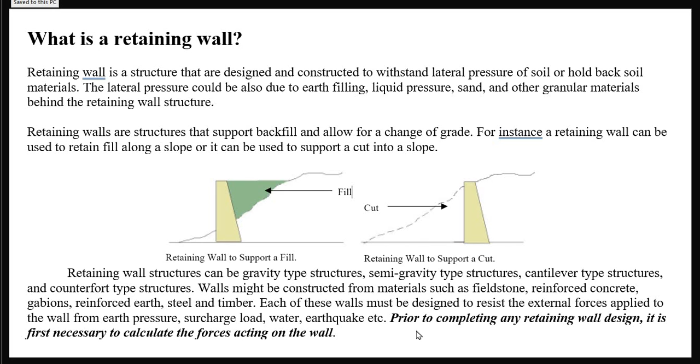Each of these walls must be designed to resist the external forces applied to the wall from earth pressure, surcharge, water, earthquake, etc. Prior to completing any retaining wall design, it is first necessary to calculate the forces acting on the wall. The types of retaining walls are: 1. L-shaped, 2. Gravity, 3. Cantilever, gabion, piled retaining, mechanically stabilized earth or MSE, crib wall, counterfort or buttressed, anchored, and lastly, hybrid systems. Ito naman yung drawing niya.

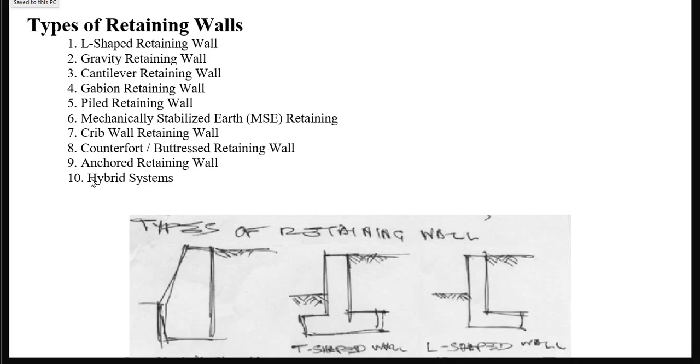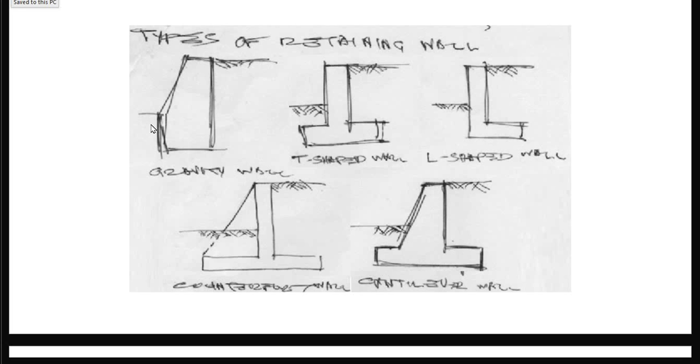So, ito yung gravity wall. Usually, this is defined by the mass or the weight of the structure itself. Wala siyang extra na extension nung footing, unlike dito sa T-shaped wall and cantilever and L-shaped wall. So this relies solely on the bulk of the mass itself. And then we have the inverted T, the L-shaped, and the cantilever wall. Itong cantilever, it is a combination of gravity and L-shaped wall. So, ang ide-design natin dito would be itong first 3: 1, 2, and 3.

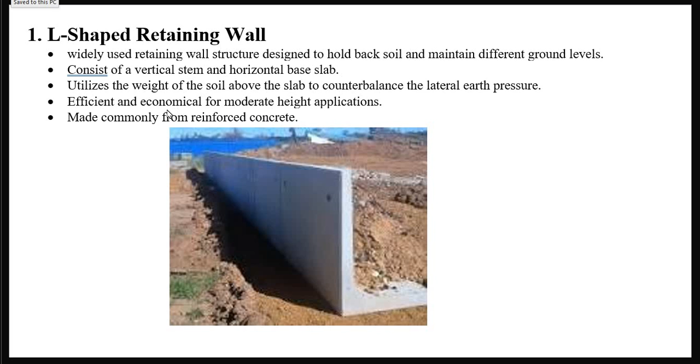Para sa L-shaped retaining wall, it is a widely used retaining wall structure designed to hold back soil and maintain different ground levels. It consists of a vertical stem, which is ito, and a horizontal base slab. Usually, yung base slab, yan yung nasa ilalim ng soil, and itong front face, ito naman yung nakaharap sa kalsada. It utilizes the weight of the soil above the slab to counterbalance the lateral earth pressure, efficient and economical for moderate height applications, and it is made commonly from reinforced concrete.

And then we have the gravity retaining wall. It depends on its self-weight only to resist lateral earth pressure. A gravity retaining wall is massive because it requires significant gravity load to counteract soil pressure. Sliding, overturning, and bearing forces shall be taken into consideration in the design. It can be constructed from different materials such as concrete, stone, and masonry units. It is economical for a height up to 3 meters. Crib retaining walls, gabions, and bin retaining walls are also types of gravity retaining walls.

And then number 3, we have the cantilever retaining wall. It is composed of a stem and base slab. It is constructed from reinforced concrete, precast, or pre-stressed concrete. It is the most common type used as retaining walls. It is either constructed on site or prefabricated off-site. The portion of the base slab beneath backfill material is termed the heel. Ito siya. And the other part is called the toe. Ito naman yung nasa harapan. A cantilever retaining wall is economical up to a height of 10 meters. It requires a smaller quantity of concrete compared with a gravity wall. Similar to the gravity wall, sliding, overturning, and bearing pressure shall be taken into consideration.

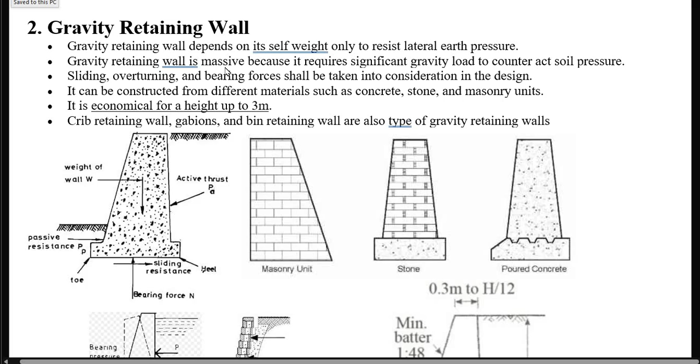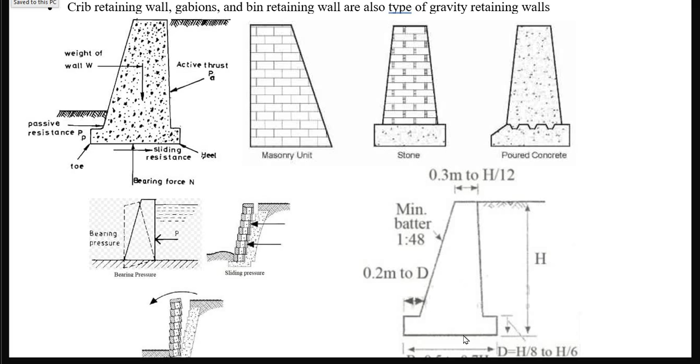Para sa gravity retaining wall, ito yung common dimensions niya. So yung top ng retaining wall, ang minimum ay 0.3 meters or 1 foot up to h/12, wherein h is from the top of the retaining wall up to the base of the footing. And then yung minimum batter or slope is 1:48, or 1 part horizontal and 48 parts vertical. And then etong depth ng footing is equal to h/8 to h/6. Tapos yung base naman ng footing is 0.5 to 0.7 of h. So ayan, magdedepend yan sa height. And then etong toe is 0.2 meters to equal to this dimension d.

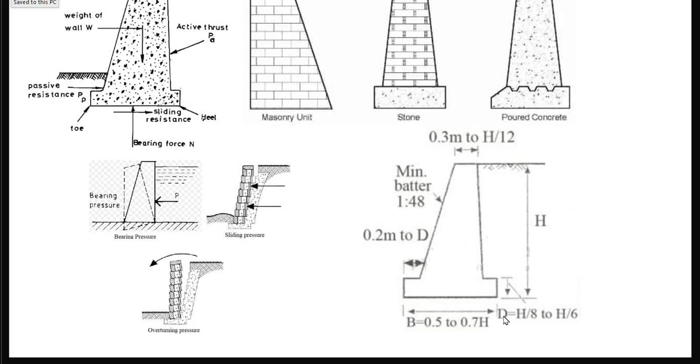And then for the gravity wall, ito naman yung modes of failure niya. Ito, bearing pressure. So yung lupa dito sa ilalim ng toe, yan ang lumambot, so magfe-fail siya. And then yung sliding naman, yung wall mo is itinulak ng lateral earth pressure.

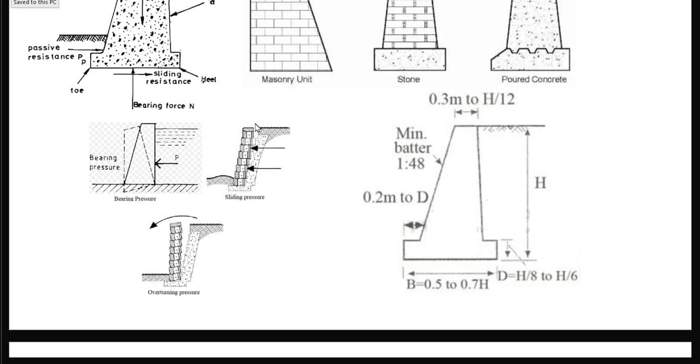And then yung overturning pressure naman is hindi enough yung weight ng gravity wall to resist the lateral force. So dito sa overturning, mapapansin nyo na yung base ng footing is naiwan doon, hindi siya nag-move. So yung top ang nag-move. Unlike sa sliding pressure, yung movement sa taas is the same as the movement at the bottom.

It is equal to 0.5 of height to 2/3 of height. By the way, etong H, yan yung overall height ng structure from the base of the footing to the top of the wall. And then yung D, this is the thickness of the footing. This is 0.1 of H. And then dimension C, this is the lower width of the stem. This is also 0.1 H. And then yung B naman, ito yung length ng toe. This is 0.25 of L to 0.33 of L. And then yung width sa taas or W, that is 250 mm.

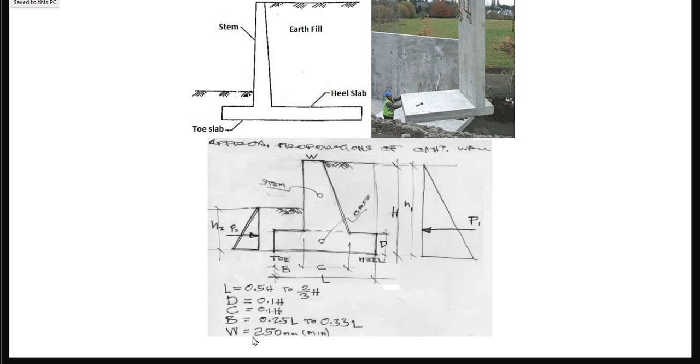And then number 4, this is gabion retaining wall. Usually ito walang konkreto ito. Pinagpatong-patong lang na bato, and then it is held in place by these gabion wires. Gabion retaining walls are walls that are multi-celled rectangular wire mesh boxes usually filled with rocks. So ang bawat cell niyan is ito, it is encased by gabion wires. It is employed for construction of erosion control structures. It is also used to stabilize steep slopes.

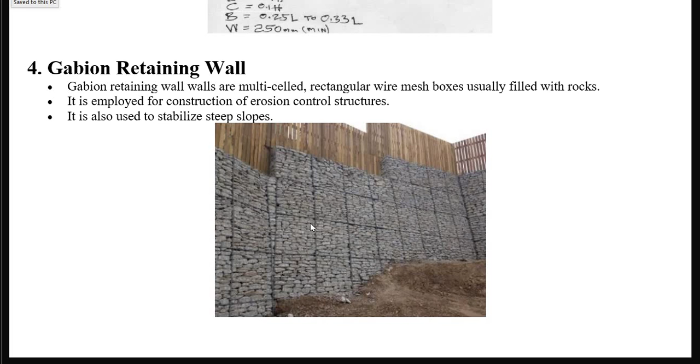And then 5, you have piled retaining wall. These are constructed by driving reinforced concrete piles adjacent to each other. Ito yung concrete piles. Usually mga bilog yan, ano? Piles are forced into a depth that is sufficient to counter the force which tries to push over the wall. It is employed in both temporary and permanent works. Piled walls offer high stiffness retaining elements which are able to hold lateral pressure in large excavation depths with almost no disturbance to surrounding structures or properties.

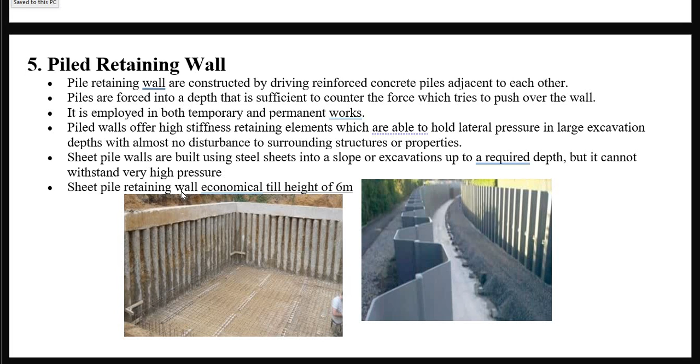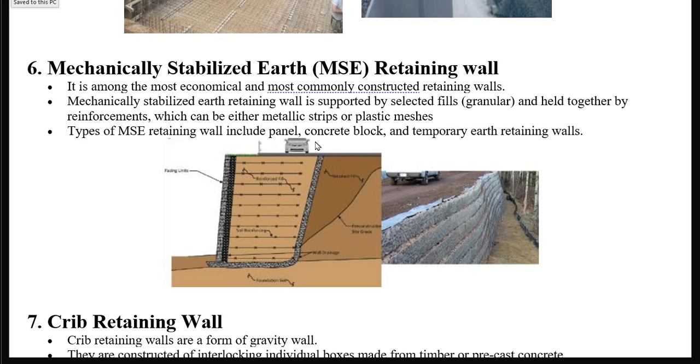Ito naman ang common, yung sheet pile walls. These are built using steel sheets into a slope or excavations up to a required depth, but it cannot withstand very high pressure. Sheet pile retaining wall is economical up to a height of 6 meters. And then number 6, we have the MSE or mechanically stabilized earth. It is among the most economical and most commonly constructed retaining walls. Mechanically stabilized earth retaining wall is supported by selected fills or granular and held together by reinforcements which can be either metallic strips or plastic meshes. Types of MSE include panel, concrete block, and temporary earth retaining walls.

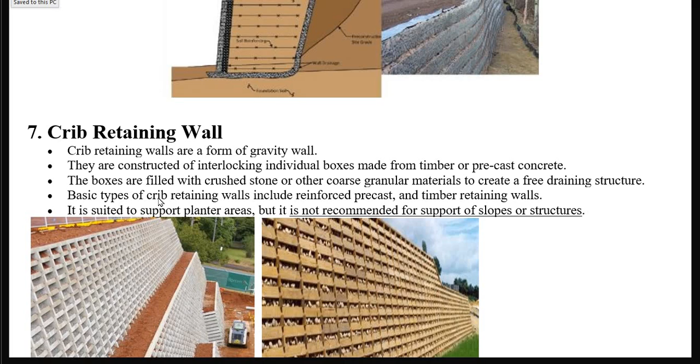And then 7, we have crib retaining wall. These are a form of gravity wall. They are constructed of interlocking boxes made from timber or precast concrete. The boxes are filled with crushed stone or other coarse granular materials to create a free draining structure. Basic types of crib retaining walls include reinforced precast and timber retaining walls. It is suited to support planter areas, but it is not recommended for support of slopes or structures. So itong type na ito, hindi siya common dito sa lugar natin.

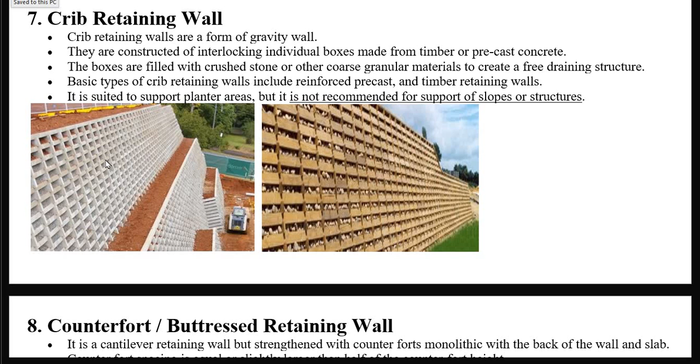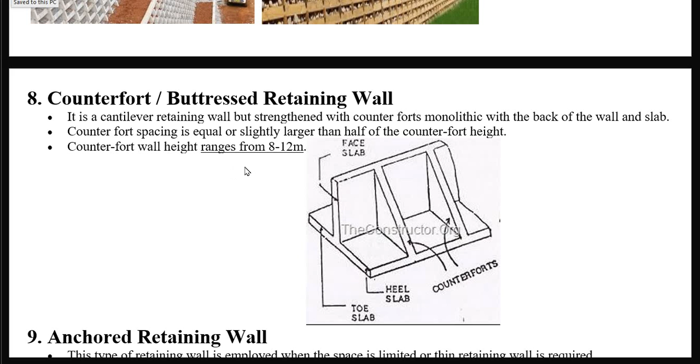And then number 8, we have counterfort or buttressed retaining wall. It is a cantilever retaining wall but strengthened with counterforts. Ito yung tinatawag na counterforts. Monolithic with the back of the wall and slab. Counterfort spacing is equal or slightly larger than half of the counterfort height. Counterfort wall height ranges from 8 to 12 meters. And then 9, anchored retaining wall. This type is employed when the space is limited or thin retaining wall is required. Anchored retaining wall is suitable for loose soil over rocks.

A considerably high retaining wall can be constructed using this type of retaining wall structure system. Cable rods or wires are driven deep into the earth, then the ends are filled with concrete to provide anchor. Anchors or tiebacks act against overturning and sliding pressures.

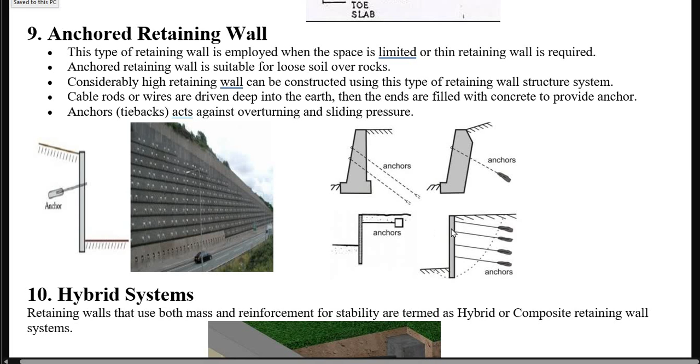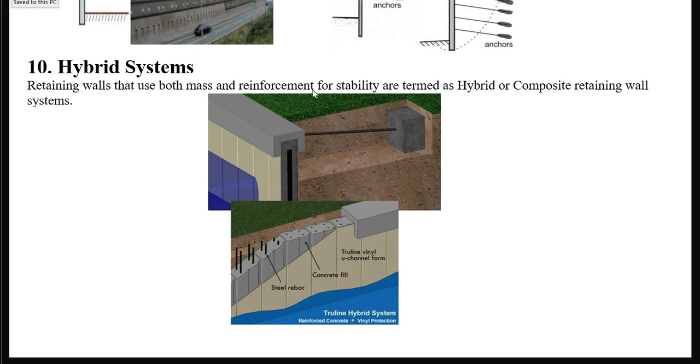And then number 10, hybrid systems. These are retaining walls that use both mass and reinforcement for stability, and are termed as hybrid or composite retaining wall systems.

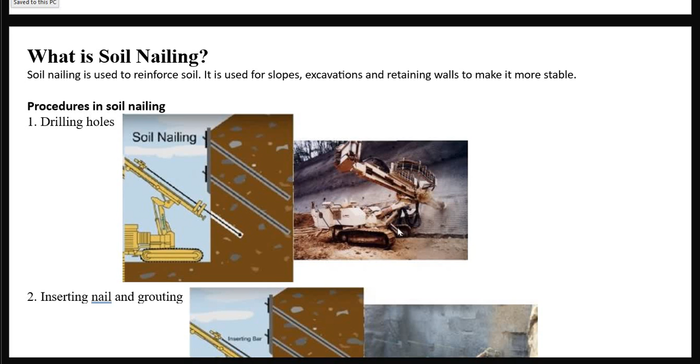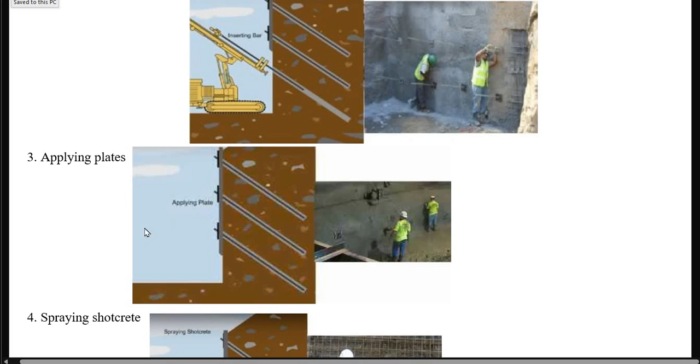And then, ito naman ang common ngayon sa tabi ng mga bundok natin, which is soil nailing. Soil nailing is used to reinforce soil. It is used for slopes, excavations, and retaining walls to make it more stable. So meron siyang mga procedures. First is drilling holes. And then inserting nail and grouting. And then applying plates. And then spraying shotcrete.

And then the types of soil nailing techniques. Number 1, drilled and grouted soil nailing method. In this type, the holes are drilled in walls or slope face. Then, nails are inserted in the pre-drilled holes. After that, the hole is filled with grouting materials such as concrete. Finally, the diameter of nails ranges from 100 to 200 mm with spacing of 1.5 meters.

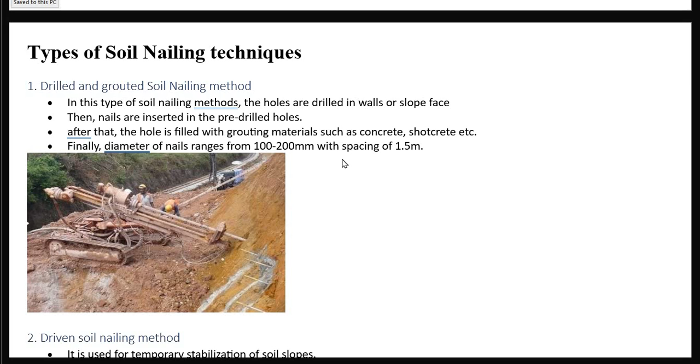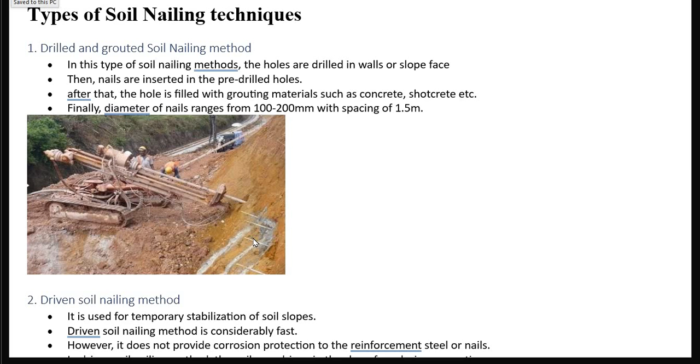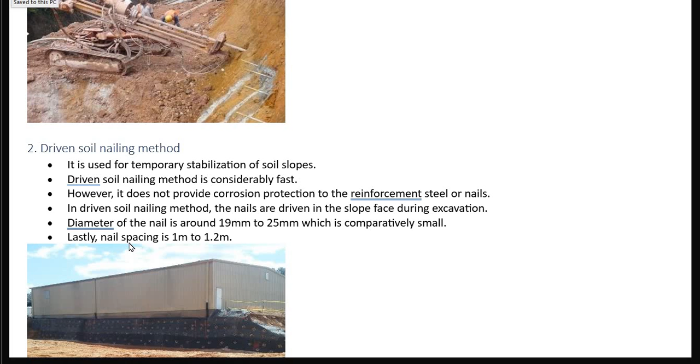So number 2, driven soil nailing method. It is used for temporary stabilization of soil slopes. It is considerably fast. However, it does not provide corrosion protection to the reinforcement steel or nails. The nails are driven in the slope face during excavation. Diameter of the nail is around 19 mm to 25 mm, which is comparatively small. Lastly, nail spacing is 1 meter to 1.2 meters.

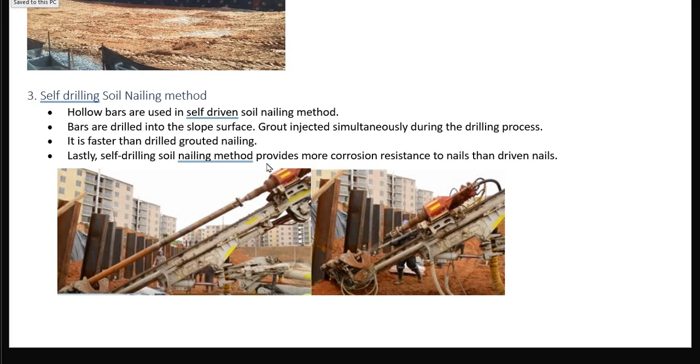And then 3, self-drilling soil nailing method. Hollow bars are used in self-drilling soil nailing method. Bars are drilled into the slope surface. Grout is injected simultaneously during the drilling process. It is faster than drilled grouted nailing. Lastly, self-drilling soil nailing method provides more corrosion resistance to nails than driven nails.

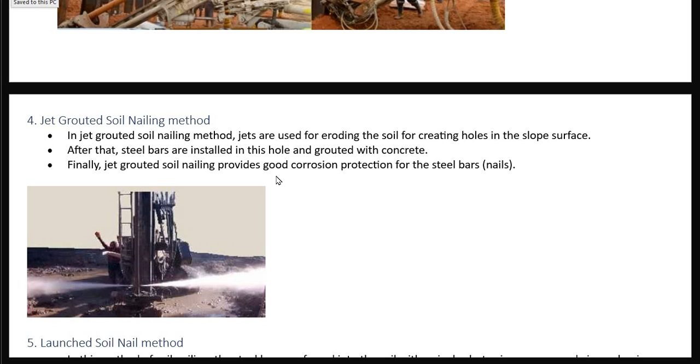And then 4, jet grouted soil nailing method. Jets are used for eroding the soil for creating holes in the slope surface. After that, steel bars are installed in this hole and grouted with concrete. Finally, jet grouted soil nailing provides good corrosion protection for the steel bars or nails.

Lastly is number 5, launched soil nail method.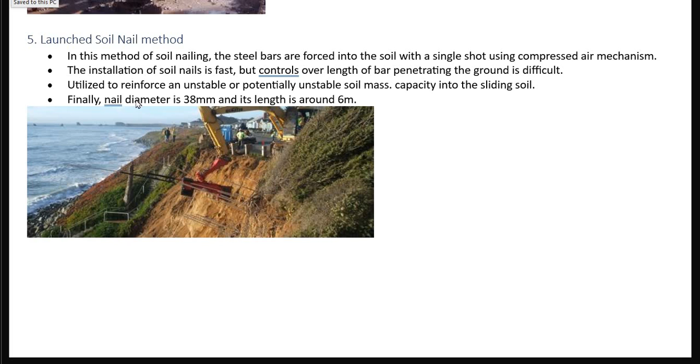In this method of soil nailing, the steel bars are forced into the soil with a single shot using a compressed air mechanism. The installation of soil nails is fast but control over the length of bar penetrating the ground is difficult. It is utilized to reinforce an unstable or potentially unstable soil mass. Finally, nail diameter is 38 mm and its length is around 6 meters.

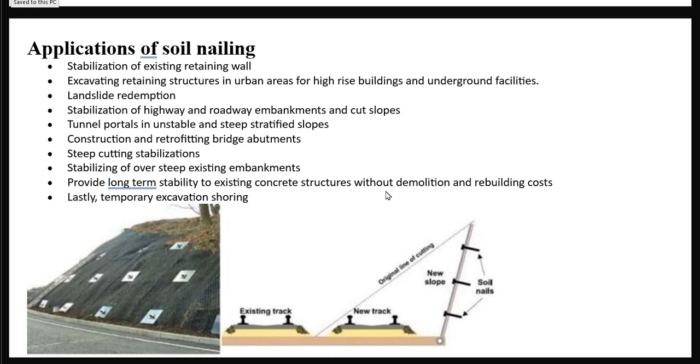Applications are number 1, stabilization of existing retaining walls. 2, excavating retaining structures in urban areas for high-rise buildings and underground facilities. Landslide remediation. Stabilization of highway and roadway embankments and cut slopes, tunnel portals in unstable and steep stratified slopes, construction and retrofitting of bridge abutments, steep cutting stabilizations, stabilization of oversteep existing embankments, and it provides long-term stability to existing concrete structures without demolition and rebuilding costs. Lastly, temporary excavation shoring.